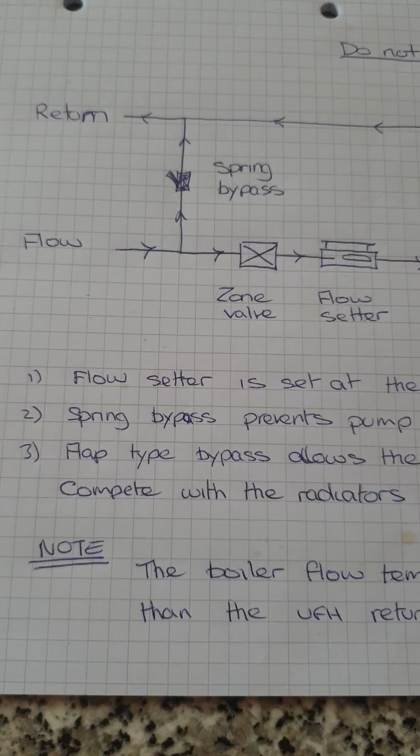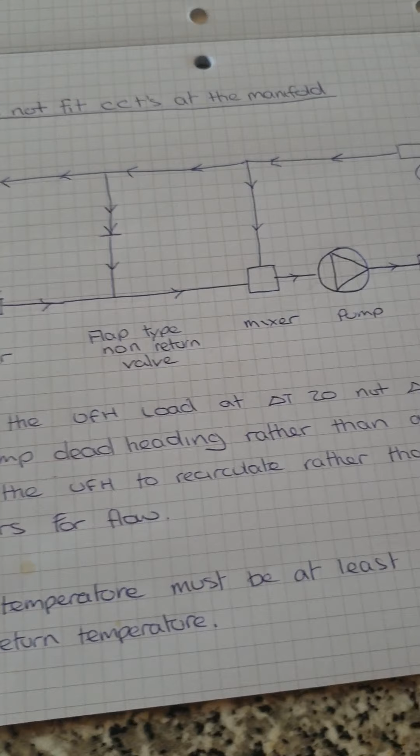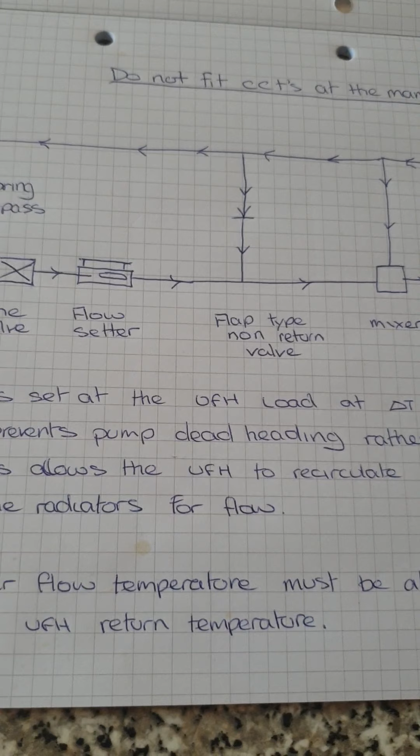So, it's been a bit overdue to do a video on the alternative that I've come up with for close coupled T's at the manifold. Now, to be fair, I've not tried this, but I can't see any reason why it shouldn't work. And if anyone wants to give it a go and give us some feedback, I'd be very grateful. I do think it's going to work.

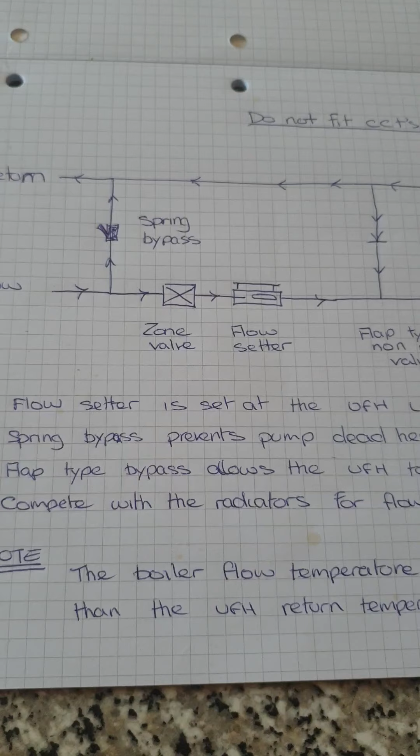Now, this does really come from an amalgamation of stuff from Viessmann and Caleffi as a workaround. I still think it's a bit of a workaround, to be honest. It's not going to work perfectly, but it'll be a lot better than a short circuit, as I've been calling it.

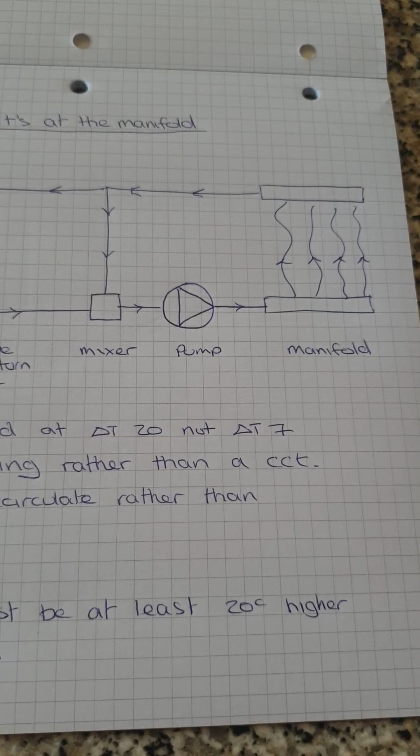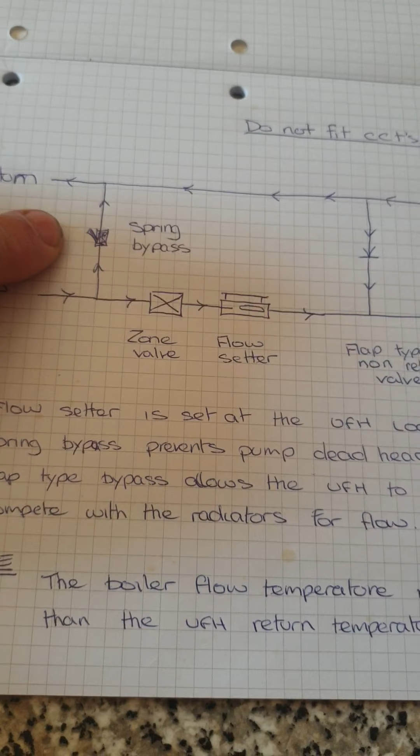So first of all, to stop the overloading or over pressurization of the manifold, spring bypass, the standard system we've been using for a long time. So if our zone valve is closed, there's no call for radiators to ease the pressure from the pump. No path for the water, opens the spring bypass.

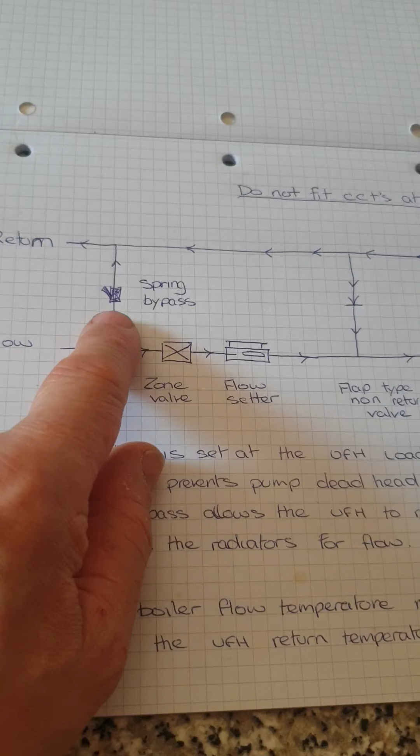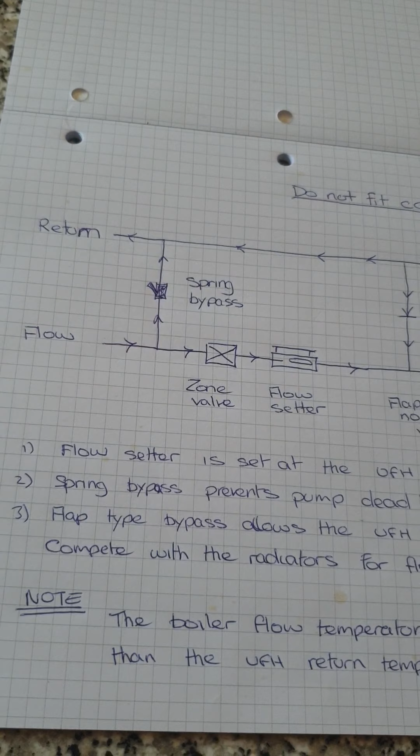This can be set up correctly, so we get a backflow to the boiler to let the boiler know that it's not wanted. That water going back will cause the boiler to basically switch off. It'll see there's no load, and that's without overheating and without deadheading.

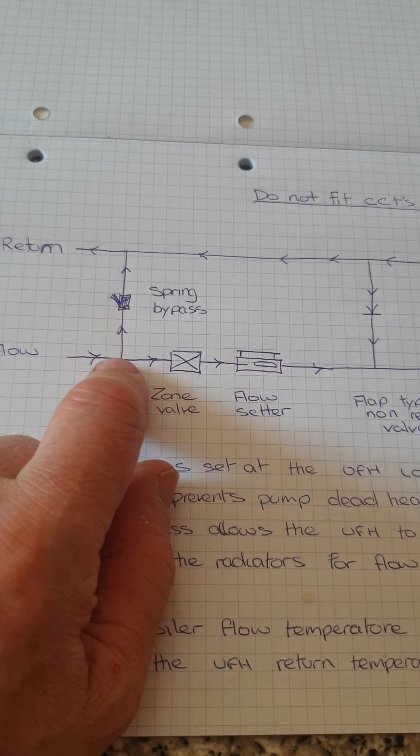That's to be fitted before the zone valve, obviously, because when the zone valve closes, we may need some balancing effect for the radiator circuit if there's TRVs on it. If not, then the spring valve won't operate anyway.

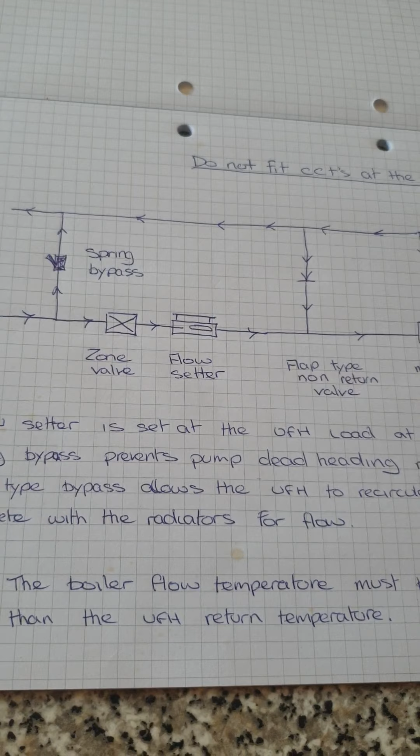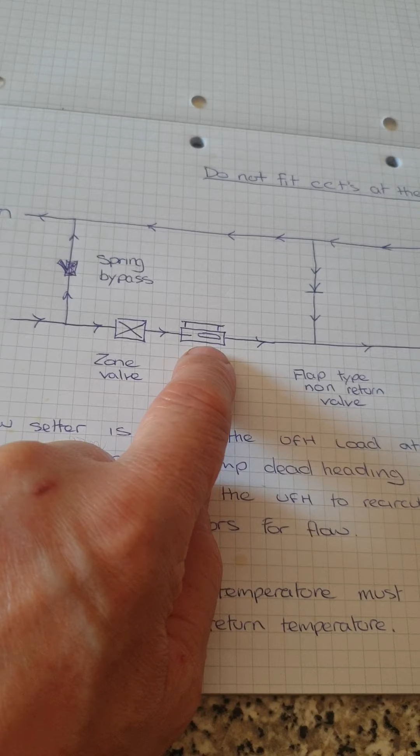Next is a flow setter. Now the flow setter should be adjusted based on the load of the underfloor at DT20, not at DT7. And this is to make sure that the pumps here can't demand from the boiler more than the flow that the boiler can provide. So it's not the same as decoupling it, but it should stop the effect of drawing water from the radiator circuit.

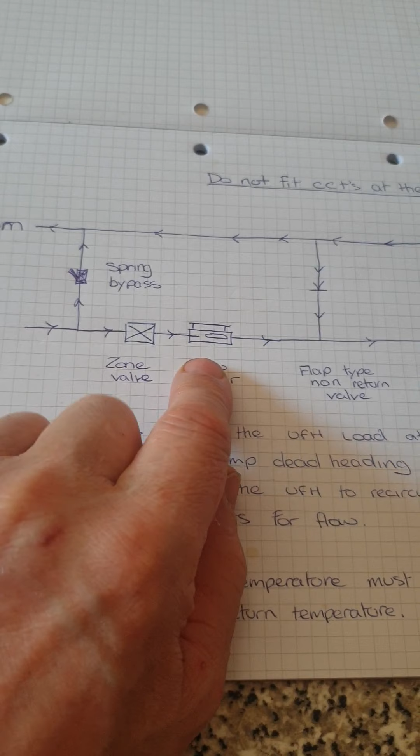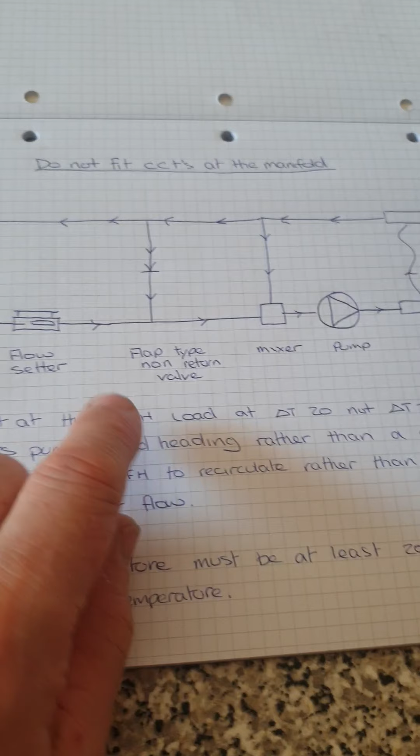So in effect, you'll still get the correct flow, the correct balance through the radiators, or close to the correct flow. You'll still get a loss of flow there, but it's going to be far less affected when this valve opens. Far less affected.

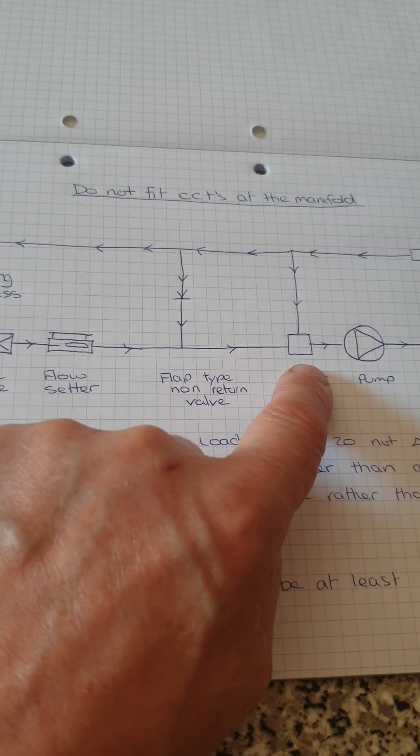Now the other thing that happens is that we get a situation where we have this flow controlled here, and basically the system wants a higher rate of flow. So this valve could be fully open, for example. This is restricting the flow to the system.

So basically it can come back through this system here, which is a flap type non-return valve. So basically we'll get the backflow that we want here. So there'll be no problem between these two. And that will be recirculating the water that doesn't go back to the boiler.

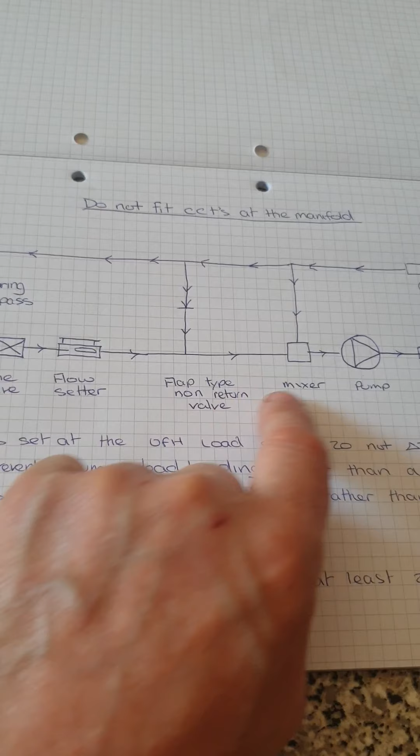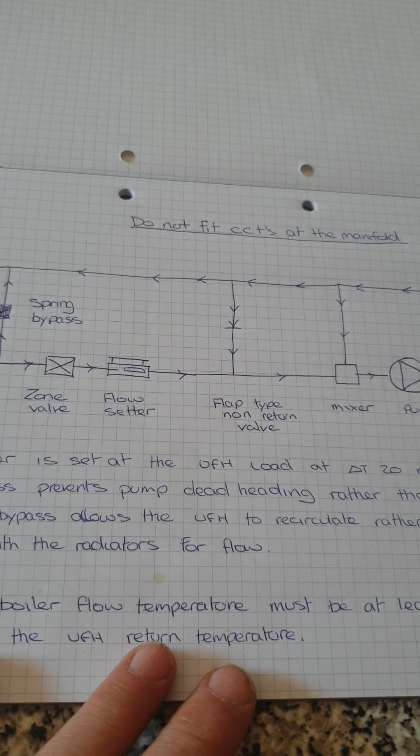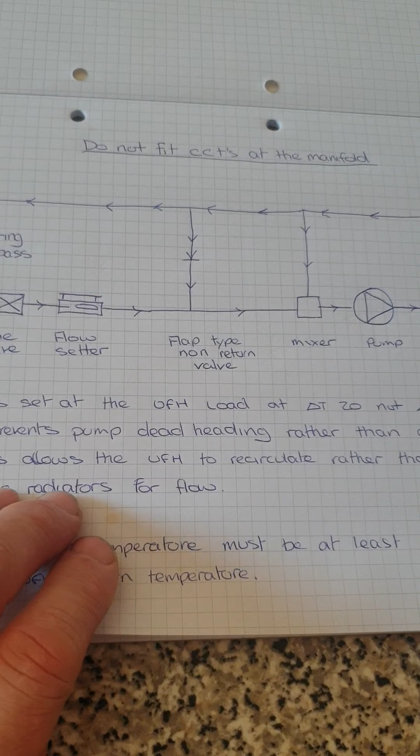Well, the problem is the boiler can't see this recirculation process going on, so it doesn't know that load's there. But either way, as I say, it's not perfect. Really, we need hydraulic separation at the boiler for it to work properly. And I know a lot of people are struggling with the concept of the boiler seeing the load. But this is a far better compromise in my opinion, but it's still a compromise.

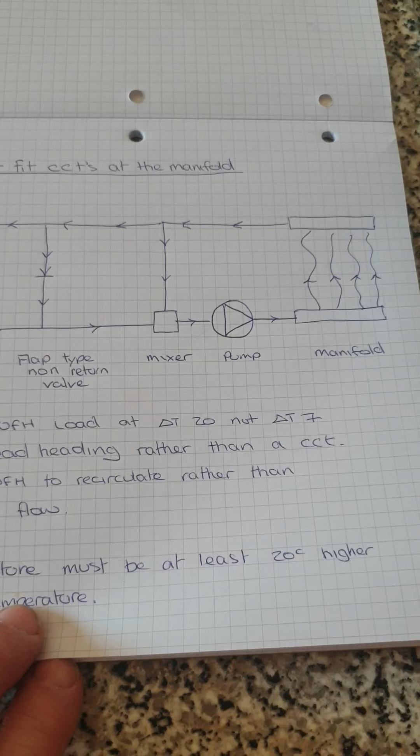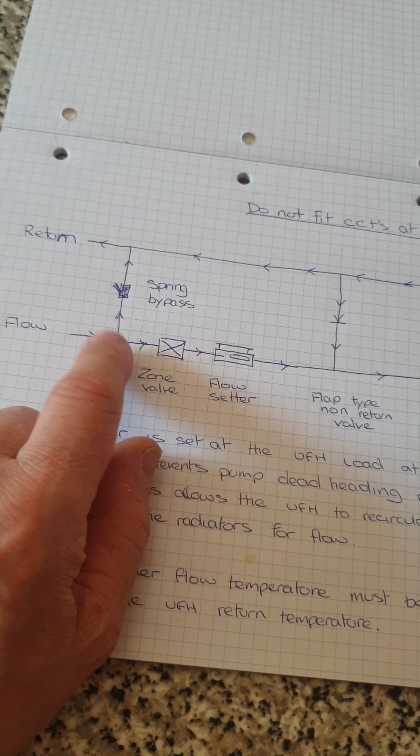If you've got no choice, all you've got to do is fit these extra items in here. So this is already going to be there, so it's a spring-loaded bypass. And don't forget, this can go at the boiler, it doesn't have to be down here. It can go at the boiler, anywhere on the system. As long as it's before that motorised valve, it doesn't matter where it goes.

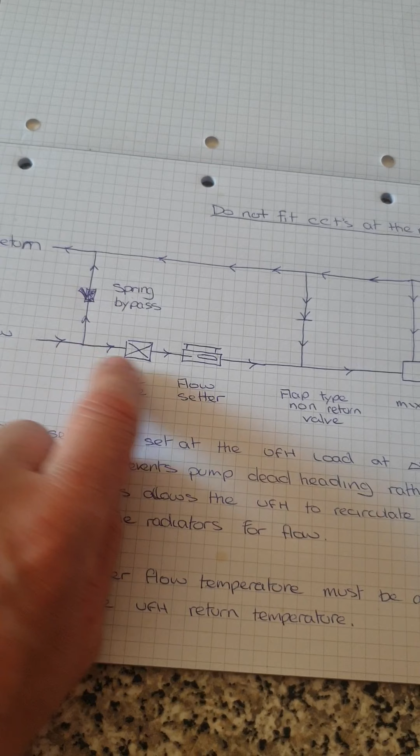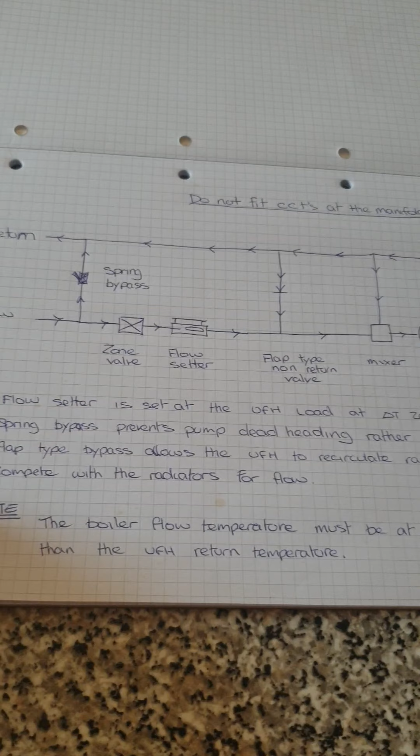So find a spot to put in the spring bypass if there isn't one there. You've got to find room for the flow setter. That's basically your close coupled T, but with a non-return valve in it. And that's it. So far less of a compromise, but still a compromise. I hope that's helped.